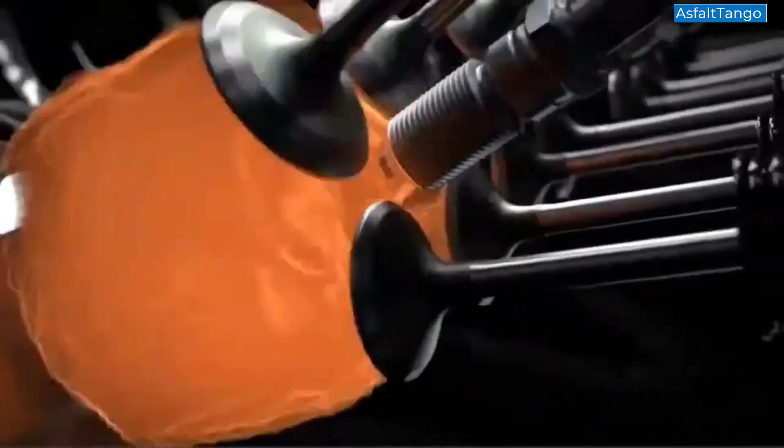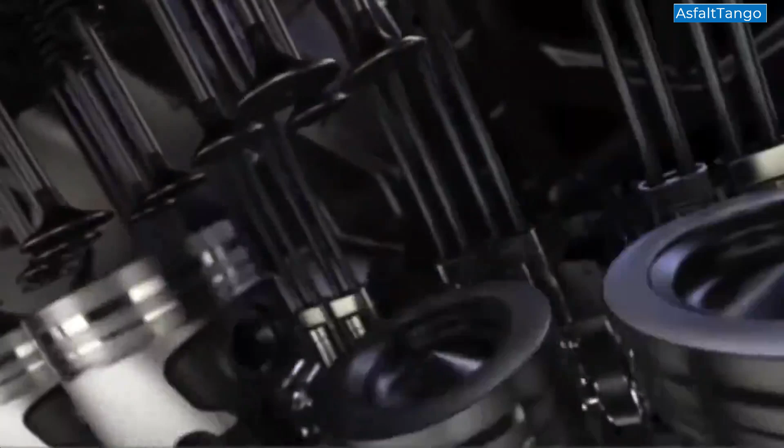We will talk about the main cause that can lead to the final destruction of an internal combustion engine: connecting rod breakage. Causes, mechanisms, and prevention. This failure can lead to the complete destruction of the engine, sometimes requiring replacement of the entire engine assembly. In this article, we will analyze the causes of connecting rod breakage, the mechanisms by which the failure occurs, and prevention solutions.

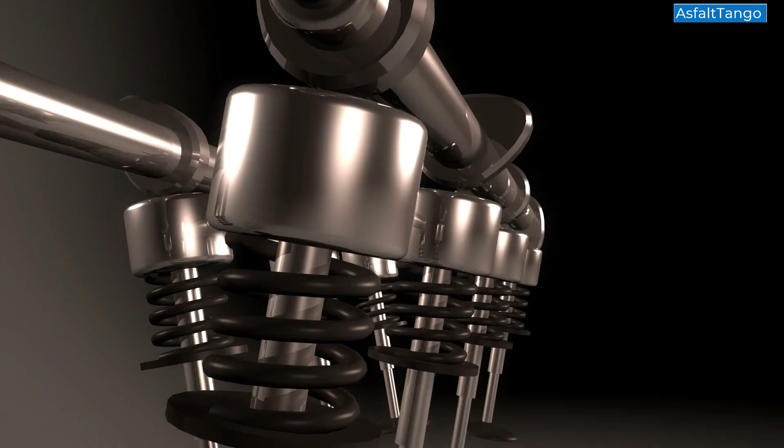What is a connecting rod and what role does it play in the engine? The connecting rod is the component that connects the piston to the crankshaft. It transmits the force developed by the explosion of the air-fuel mixture to the crankshaft, transforming the linear movement of the piston into rotary movement. It is subjected to very high tensile and compressive forces during each engine cycle.

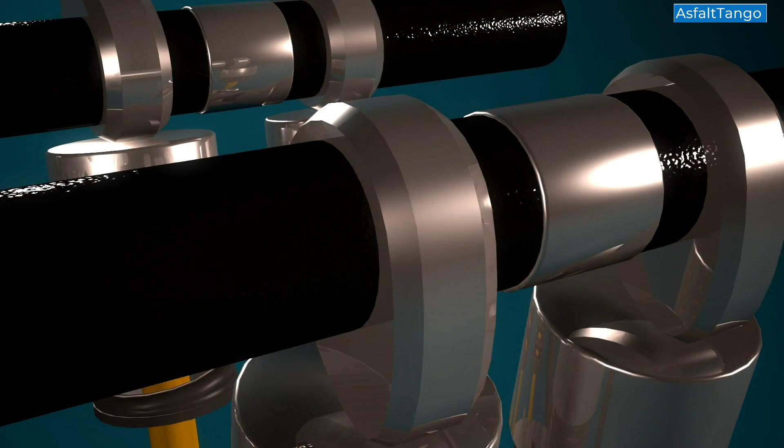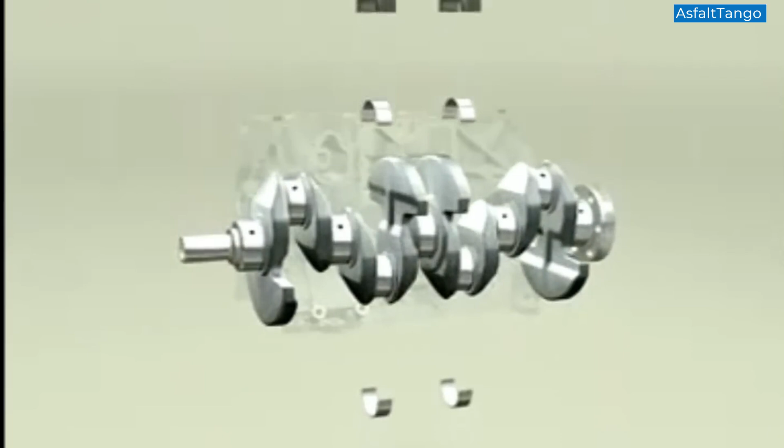Common causes of connecting rod breakage: mechanical overload, excessive revs, performance modifications without reinforcing components, supercharging without calibration such as too high turbo pressure, and detonations or pre-ignition that create uncontrolled shocks in the combustion chamber.

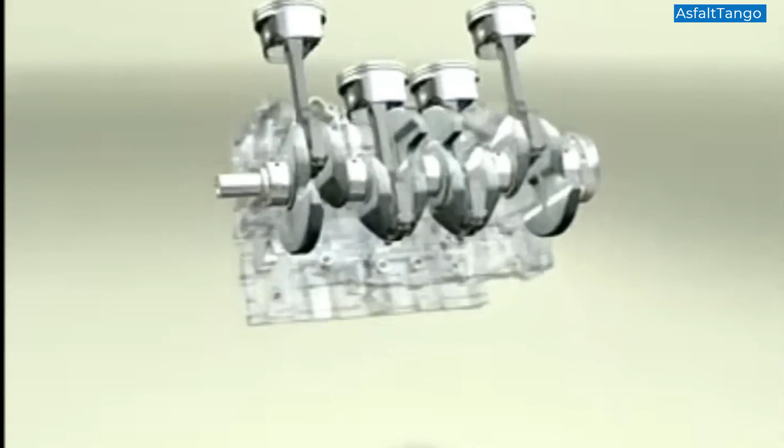Insufficient lubrication: contaminated or unsuitable engine oil, defective oil pump, clogged lubrication channels, low oil level. Consequence: seizing of the connecting rod bearing and its breakage under load.

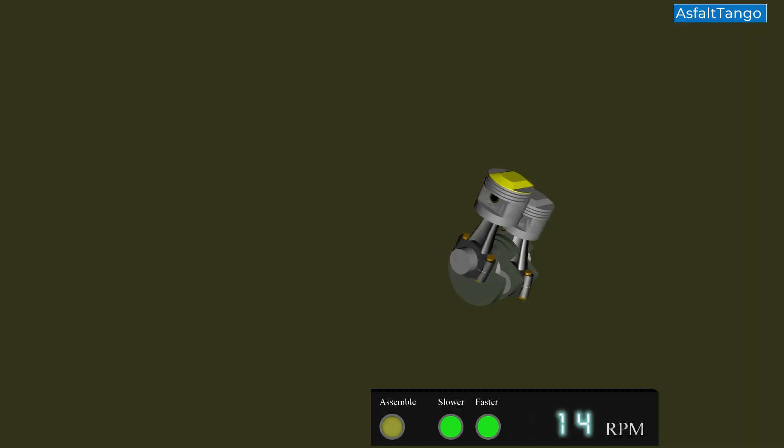Material fatigue: wear through repeated stress cycles, microcracks that propagate over time, poor quality material or inadequate heat treatment.

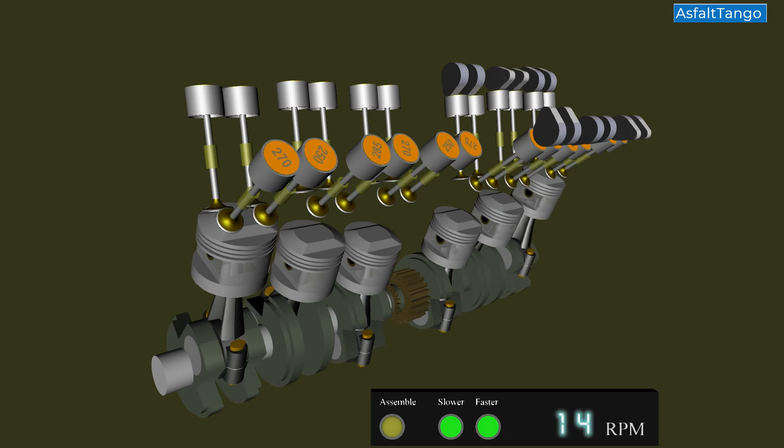Assembly errors: incorrect torque when tightening the connecting rod bolts, misalignment of the piston bolt, incompatible piston connecting rod pairs.

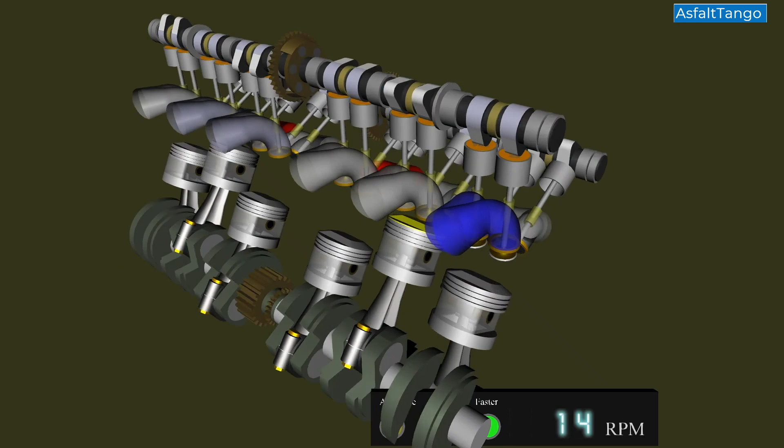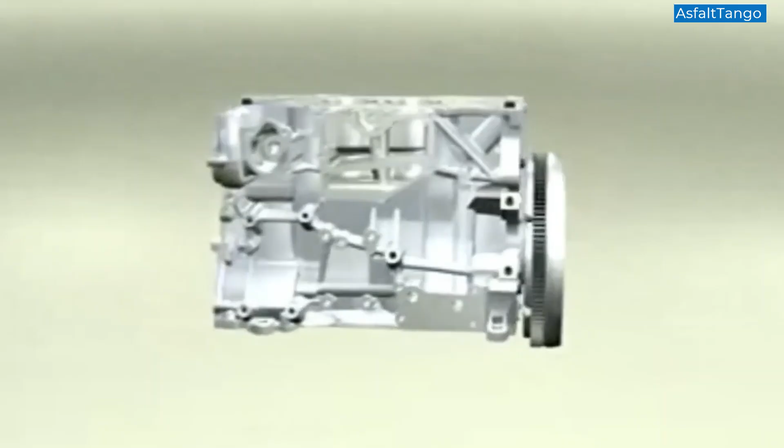Hydrolock, or hydraulic lock: liquid entry such as water or antifreeze into the combustion chamber. Liquids are not compressible, so the piston applies sudden excessive force to the connecting rod. Possible causes include driving through deep puddles, a broken cylinder head gasket, or cracks in the cylinder head or engine block.

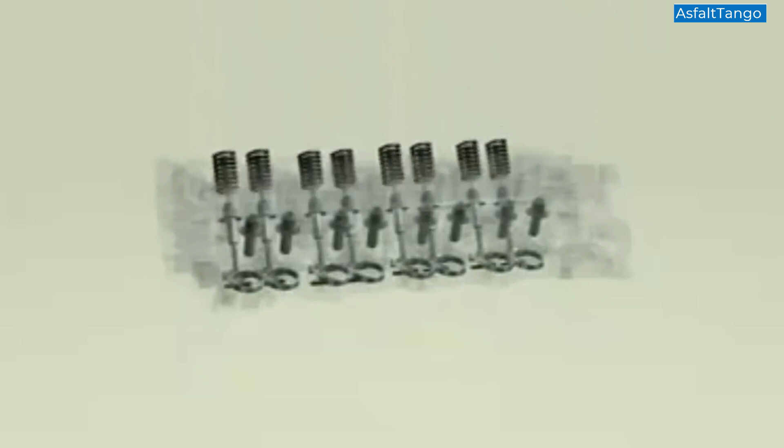Manufacturing defects: porosity in the material, lack of hardening treatments, dimensions outside tolerances.

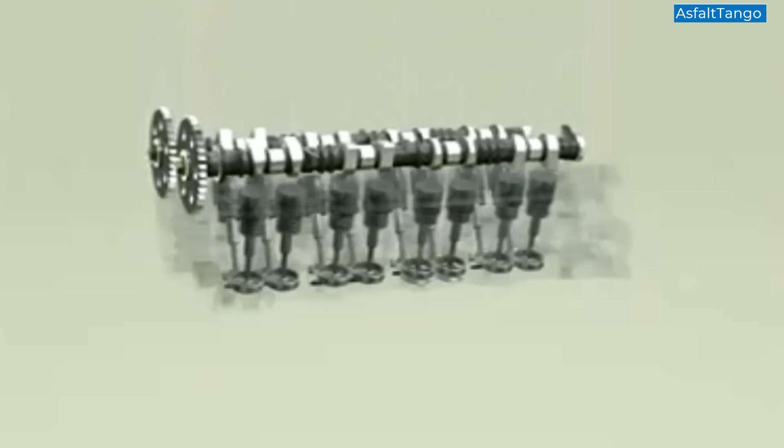Case study: connecting rod breakage on a modified 1.9 TDI engine. A diesel engine modified with a hybrid turbo and software remap suffered a broken connecting rod in cylinder 3. Post-mortem analysis showed increased boost pressure to 2.2 bars and a lack of prior reconditioning of the connecting rods.

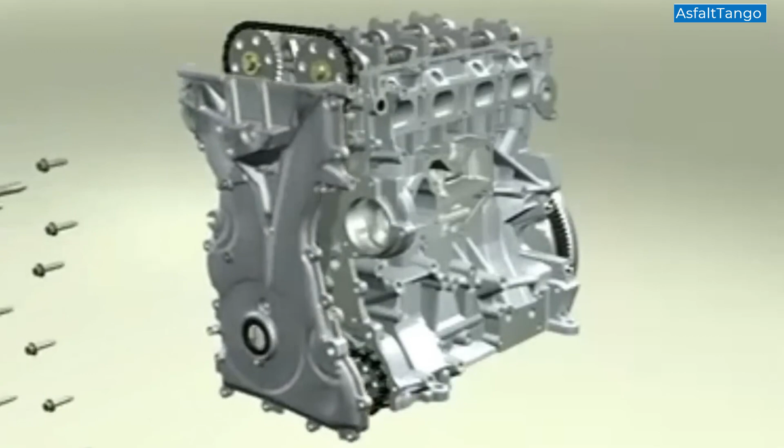Clear signs of knock were found in the central cylinders, and oil with deposits, a sign of overheating. Conclusion: combined stress from knock, high temperatures, and turbo pressure above design limits.

Symptoms and probable causes of connecting rod breakage: heavy mechanical knock indicates connecting rod bearing play or complete blockage, engine connecting rod breakage or seizure. White smoke or liquid in the manifold indicates hydrolock. Extreme vibrations at speed indicate deformed or poorly mounted connecting rods.

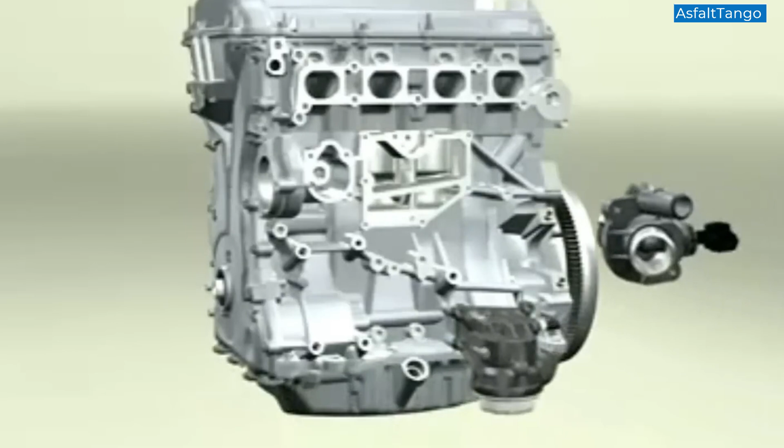Prevention: how to avoid connecting rod breakage. Use quality oil and change it regularly. Avoid excessive cold revs. Do not modify the engine without reinforcing the internals, such as using forged connecting rods and ARP bolts. Check for signs of knock or detonation and correct by mapping. Monitor oil pressure and engine temperature in case of reconditioning. Respect tightening torques and tolerances.

Conclusion: a broken connecting rod is a consequence of multiple factors: mechanical, thermal, and maintenance. In many cases, this failure can be prevented by carefully monitoring engine parameters, choosing the right components, and proper maintenance. Knowing the causes and manifestations of a broken connecting rod can make the difference between a reliable engine and a costly breakdown.